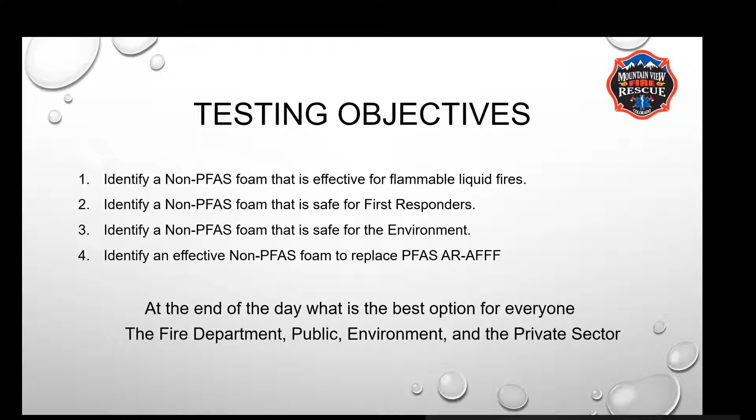House Bill 1279, that's the House bill that made it illegal to sell or buy the PFAS-containing foam next month, August 2021. And so if you need to buy it, you better buy it today or tomorrow, because after next month you're no longer able to buy it.

But they also do a survey every 3 years. So of the 331 fire departments, airports and private industry that were surveyed, only 26 responded. I know my department didn't respond 3 years ago when they did the survey, but there just wasn't a whole lot of knowledge or interest in foam. And one of the things I found, and myself is in this category as well, not right now, but a lot of people don't care about foam until you need it, and then it's a big issue, and you want to make sure you have the right product.

House Bill 2019, this is a certification of registration program. And the way that I read it, I'm not a lawyer, but it permits the use and storage of the PFAS foam. And so we registered the foam that we have at our station, over 200 gallons of it, so that if we had to use it, we're in compliance with the House bill that passed.

One of the best bills that passed is the Senate Bill 2018, and that collects the fee for the fuel transports, which funds the state buyback program. And that's why we're all excited to hear what David Donnie says about the state buyback program. And I think a lot of states are doing that. If we have a bad product and we need to replace it, it's really expensive. So the best thing the state can do is to help fund that replacement. And I know buying these totes, you're looking at several grand, almost 8 or 10 grand for a tote of foam.

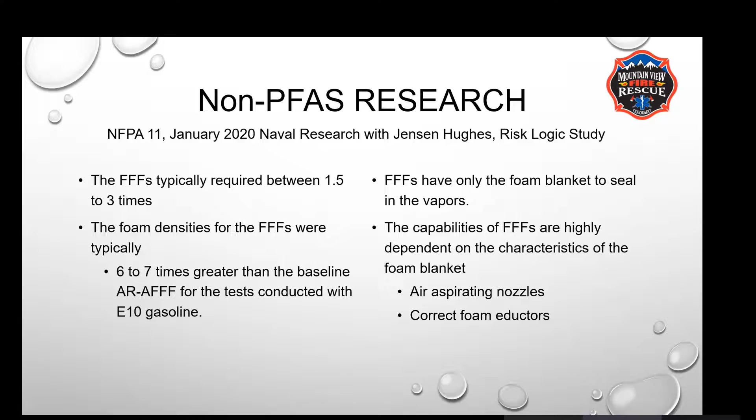Here's the list of the foams that we did. So we had about 15 foams that we tested. This is a list from 91. So we were a little overwhelmed trying to figure out what foams do we test. So we went through and picked out some of the bigger name brands. And so you can see Fomtec, we have Phos Check, Universal Green, Green Fire, Solberg, and T-Storm.

So we went through all these, and one of the things that I did when I contacted these companies is I said, hey, we're looking to replace our AR-AFFF foam. Can you send us a replacement for it? And I got all these foams. Now, Phos Check, they sent me a synthetic foam, but they also sent me a Class A foam because we were testing foams, and they're like, well, maybe we'll get more business, so we'll send you some more foam.

But some of these companies sold their product as a replacement for the AR-AFFF. And this is one of the areas of deception that there is in the foam industry. All of them were UL listed, but there's two distinct differences between the UL listing. One is UL listed per NFPA 18, which is a wetting agent, and the other is per UL 162, which really evaluates the foam blanket and the burn back.

And if you look at the testing for those, they use the same 50 square foot pan, but the way that it puts the fire out is completely different. The wetting agents don't evaluate a foam blanket or vapor suppression. They just see if it can put the fire out. UL 162 evaluates the foam blanket and how well it holds up against fire and direct flame impingement.

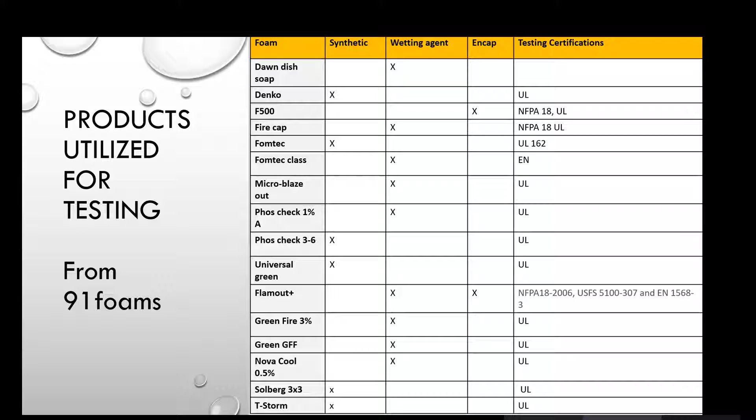And so from this list, we have the synthetic foams, which are the true replacements for AR-AFFF. We also got a lot of wetting agents and then encapsulator agents. And early on, if you do some research about the F500, I was really excited about it. It seemed like it had some good properties, but the amount that you need in order for it to be effective just isn't practical.

So with that initial kind of somewhat deception of what foams will really work, we knew we had to really look at our testing criteria. And one of those was the expansion ratio. Is it even possible to get a good expansion ratio from these foams? Then we looked at the drain down time, and that was just seeing how long that foam blanket lasted.

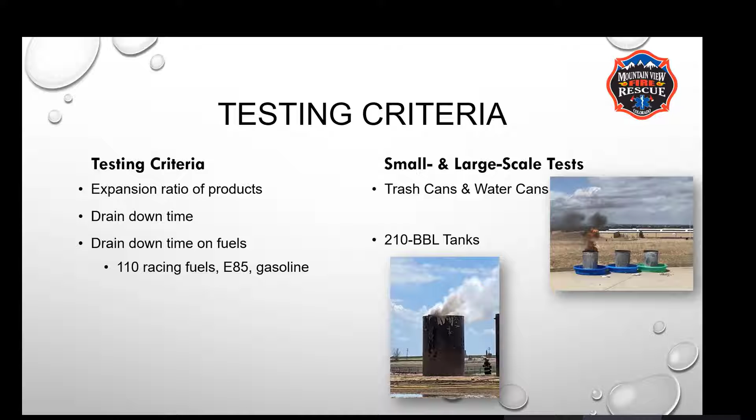And then we tested the drain down time on top of fuels, because putting a foam blanket on the ground really doesn't tell you anything, but putting fuel underneath it will really give you that good indication of how well it performs. And then we took that information to a small scale test. As you can see up here, we lit the fuel on fire, and then we did the large scale test with Crestone Peak. So one of the things, I had never really looked at expansion ratio and how you figure that out and make it scalable.

We came up with the idea of putting a gallon of water in a water can and then putting the appropriate foam mixture and then putting it into a trash can and measure how much volume we got. So here's an example of that. We measured out with duct tape the expansion ratio, and this is Dawn dish soap. We had it around, and all the foams we tested, it was like, oh, you get good bubbles. And so we're like, well, what does Dawn give us?

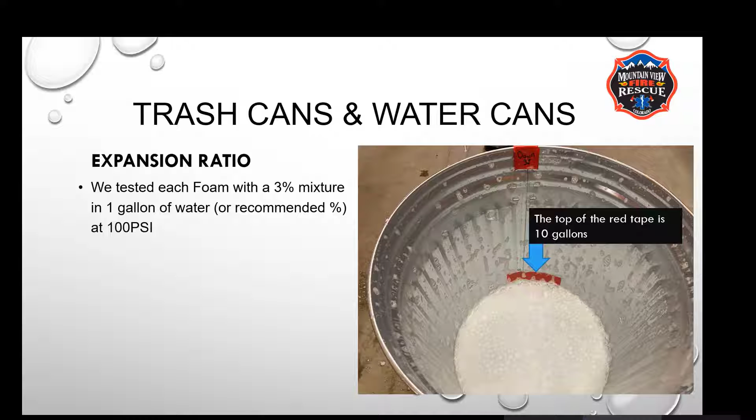And so we tried a 3 and 6% of Dawn and we tested it out, and it had a good foam blanket, but one of the differences is the density quickly evaporated with it. So we did this with every foam to test the expansion ratio and see how long it lasted, and we had really good results. Here's a list. I will note the DT means drain down time, and so we evaluated at 5, 10, and 15 minutes to see if there was any change to the foam over time.

So at the top, I have 3/6, that's the percentage. So some of the foams were 3%, some of them were 6%. And one of the things we had to overcome is some institutional knowledge at my department. We were told once that Micro-Blaze Out works really well on polar solvents if you put it at 6%. We found that not to be true. And so some of the initial foams that we tested, we were like, well, let's see what we get if

we double it. And that also gives you an idea, if you're doubling the foam, of how much you would need. And so if you're fighting a fire and you need 1.5 to 3 times the amount, if you're doubling the amount of foam, it'd give you a better foam blanket, but it also increases the cost. And it was just kind of a curious thing that we were looking at, how much difference. The Phos Check is a 3x6. So it's a 3% ratio for hydrocarbons, a 6% for polar solvents. And so if you're using it on that, you have to use that higher percentage rate.

But we used a water can, which is just a smooth bore nozzle, and we went against the side of the trash can and let it roll down into the trash cans. One of the things is we didn't have much of a budget, and the scalability of it was also an issue. If we flowed 100 gallons a minute, trying to test the expansion ratio would quickly create a huge mess when some of these foams may be potentially bad for the environment. And so we used the water can and trash cans to do all the tests on the small scale.

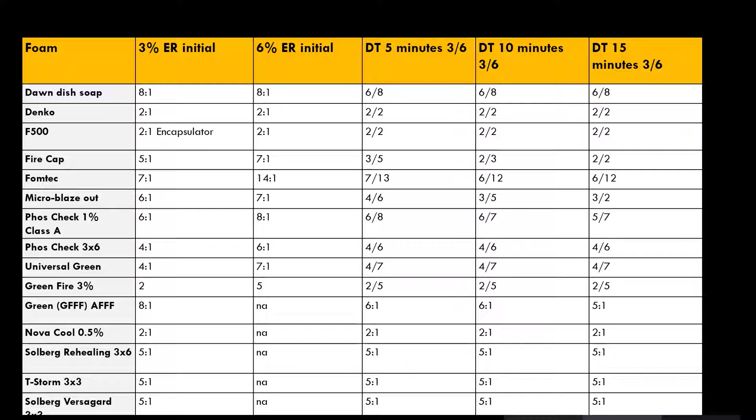And we treated every foam exactly the same. We stood 5 feet away from the trash can. We emptied the water can completely into the side of the trash can, so that we had consistency across every foam.

So for the small scale test, we wanted to see how well the foam blanket held up against fuel. The first thing we had to figure out is how much foam to do. There's a lot of demonstrations out there. So if I put 10 gallons of foam on top of a cup of fuel, of course, it's going to look really good and it'll impress you, and everyone will be like, man, that's a really good foam. But if you look at the math behind it, you're overwhelming it, and you're not going to put that ratio on these fires. And so we went with NFPA 11. They have the application rate.

And that was just a starting point because we had no idea how to do a really good test of the foam on top of fuel. And we figured starting with some NFPA standards was a good starting point. The caveat to that is the NFPA standard says you need that for 65 minutes. And so we took the gallons a minute, put it on the fuel over a short period of time, but we were really looking at the volume of foam that we put on it.

And so we did several tests with the water can to figure out how to get 28 ounces of water out of a water can. We did several tests with a metronome, and for each of these tests, we actually used the metronome to give us that 3-second shot of foam out of the water can to keep it consistent. This is just an example of the universal green. So you can see this is right after we put the foam on.

This test isn't perfect, and we're not scientists. You can see there's little gaps here where the turkey pan didn't fill everything. But right here, this is initially after we applied the foam. It looks like a really good foam blanket. But in 10 minutes, and I have all these pictures labeled so you can go in and look at them, you can see the vapors starting to break through that foam blanket. And we did a minimum amount. We didn't put that 1.5 or 3 times the amount because we wanted to test everything exactly the same.

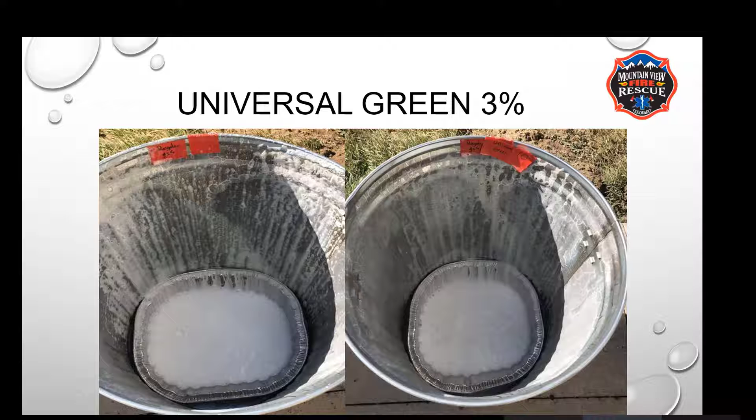Let me go to the next slide. Here's the result of that test. And so we did exactly the same for every one of these foams. We did 3 different fuels to represent the hazards in our district. So 110 racing fuel for the airport, and then we have Colorado National Speedway. We did gasoline because it's the most prevalent hydrocarbon in the area. Every car has it. And then we did E85 to test the alcohol resistiveness of these foams.

There's a lot of information. So yes means the foam blanket was intact. No means it started to break apart. In the initial test, most of the foam struggled to last that 15 minutes. We got T-Storm a little bit later in the game because it was released, I think, in April. When we did the same test, it lasted for 35 minutes on top of the fuels.

And something else I'll note, when we did this small scale test, my crew and I kind of developed some biases with foams that we were testing because we put a lot of effort into it. We had 4 or 5 people that weren't part of that initial testing there to record the information and verify it. So we had Danny from Crestone Peak. He was there to observe it. We had Lieutenant Becker from Greeley Fire. We had Tron from the CPRN group. And then we had Doug Saba, our fire marshal.

They weren't really part of the initial testing of the drain down time, looking at the foam on top of fuel. So they came into this kind of unbiased. I'm sure they had their own biases or information on foam, but they didn't really have all the information and research that we did on the foam. And so they recorded all that information. And I wanted that to make sure that our biases weren't brought into this small scale test, because the intent was to use the small scale test and take it to a large scale test.

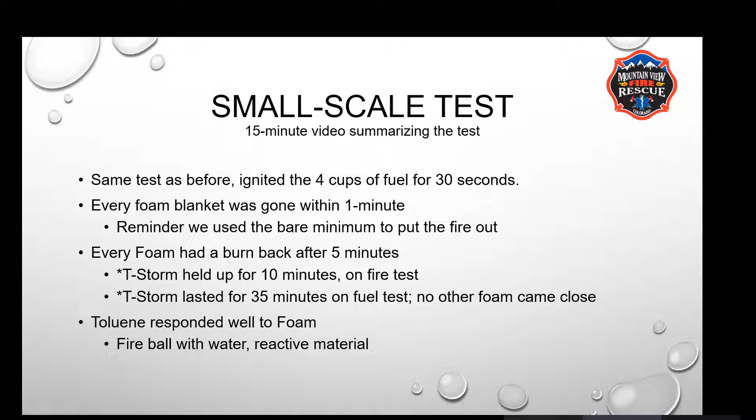The other thing that we tested in the small scale test was toluene. We have Boulder Scientific in our district, and it's water reactive material. We knew that if that catches on fire, we don't know what's going to happen if we put water on it. And so we tested it. We did get a fireball with just straight water, which was kind of cool to see. And it's in the video. But when we applied foam with it, it went out right away. And so I feel confident that if we had a fire at Boulder Scientific and we used foam, we would be able to put that fire out. But if we use water, we'll make it burn down a lot quicker.

So here's I guess a little teaser of the large scale test. And I know Danny just walked out, but when we started this, I had no idea that it would lead to this large scale test where we actually got to test the product on these tank batteries and put condensate in it. And it was a great experience to do that. We had a lot of help to get there.

I know one of the things that I struggled with is figuring out the permits, like how do we light these fuels on fire without violating any EPA regulations or anything. And Dave Burns from Weld OEM was really helpful in that, figuring out all of those legalities. And it was great to have Fort Lupton and Brighton there as well, and Greeley.

And we had the same research team. So Lieutenant Becker from Greeley, Danny from Crestone, Tron from the CPRN group. We had Hugh Kane there from Eaton Fire, and then Doug Saba from Mountain View. They were part of the research group to record all the information, because the test is only good if you can capture the information and be able to share it. The other thing that we did is we had a TIC, and I have a video of it just showing the cooling of the tank, because it's kind of cool information to see.

From the small scale test, we picked 3 foams to take to the large scale test. One of them was Micro Blaze Out. Mountain View currently has Micro Blaze Out on all of our frontline engines, and we use it because it has the bioremediation effect, and it's supposed to be good for the environment. However, when you look at the SDS sheet, it has some warnings on there that it may cause an allergic skin reaction and can cause serious eye irritation. It's a health hazard 1, and its signal word is warning. So caution, warning, danger. And this foam is green screen certified.

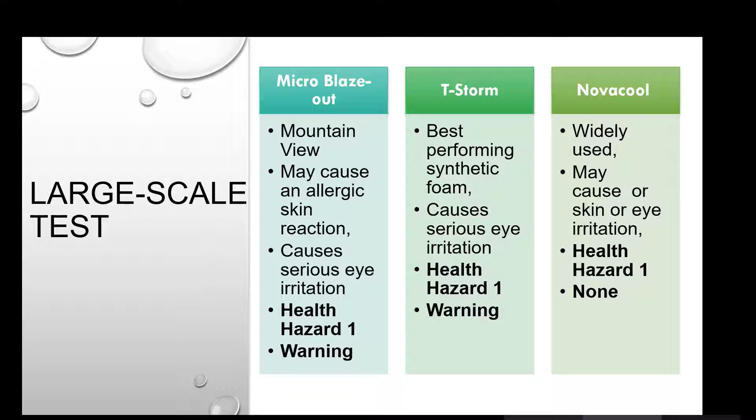One of the advantages is it's health hazard 1, but it doesn't have a signal word, so not the caution, warning, danger. It's supposed to be a little bit more environmentally friendly. So we took these 3 foams to the large scale test, and here's a video of it. It's about 7 minutes long. I have some screenshots of the video so we can talk about the results, and if you guys have any questions during it, it should answer your questions.

The one thing to note for someone that watches this video is that there was a 2-inch nipple on the side of the tank, and that's where we stuck a rod in to light the fuel. That's also where we put the Pro Pack to put the fire out. One of the biggest struggles that I had, and I had to kind of argue and wrestle through this with some individuals who are here in this room who helped me out, is having an effective test. My intention was to use a hand line and show the effectiveness of a frontline engine putting a tank battery out, because that's what we do.

Well, through a lot of learning on my part and an effort to try to get this foam right, I learned that that's not necessarily the best way to do it. And if you do the NFPA 11 application rate for these small 10-foot diameter tanks, the application rate is 12.5 gallons a minute. Now, hopefully that causes you guys concern, because no one in here should fight a fire at 12.5 gallons a minute. It just seems stupid, right? But that's the NFPA standard for these tank batteries, or for tank fires. And it's really intended for these large area tanks.

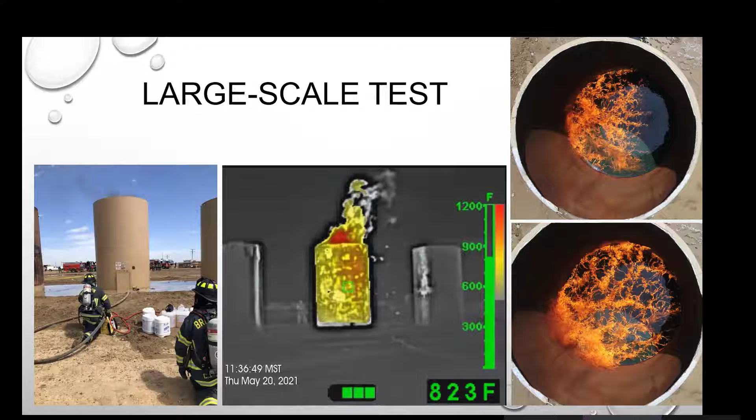But I wanted to see if the math is right that we've been doing all along. Is that application method and all the math correct? And so we did 12.5 gallons a minute through a Pro Pack through the side of the tank, and that's what you'll see.

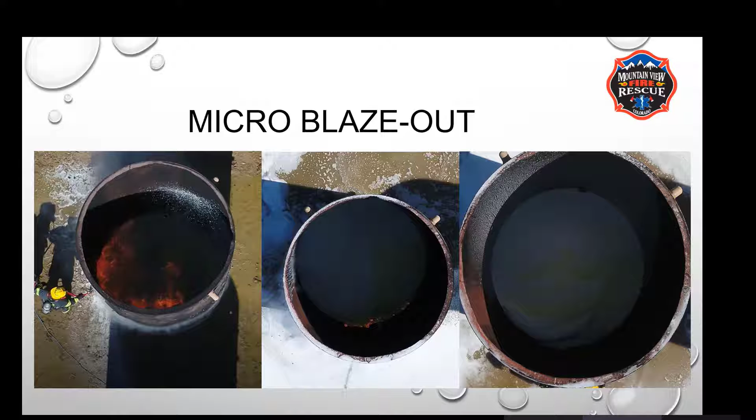And we were originally going to do a 5, 10, and 15-minute burn back. But during that time, we had a helicopter buzz the training site. So we figured flying a drone and lighting the tank off with a helicopter right above us probably wasn't a good idea. But the foam blanket, even putting that much foam on it, didn't last for 15 minutes. Here's a breakdown of it.

And this here, I'll note, so we flowed 288 gallons of water through the Pro Pack to give us the finished foam product. I don't want to get down the rabbit hole of how much actual foam it is because you have to look at the expansion ratio and all that. But that's the amount of water and finished foam roughly that we got. It took 24 minutes to control the fire. The knockdown time was 2 minutes, so it seemed to knock it down pretty good.

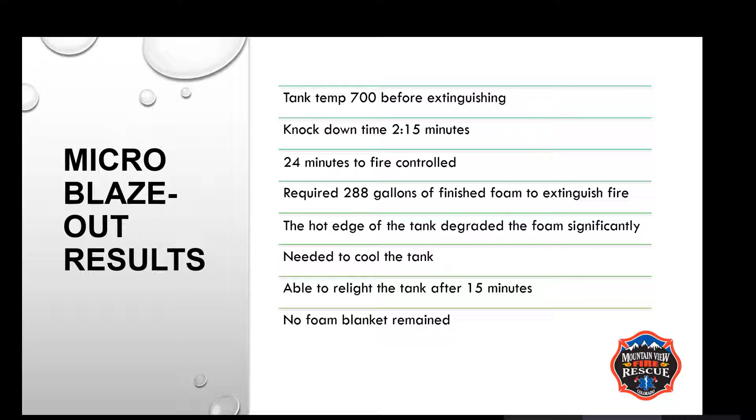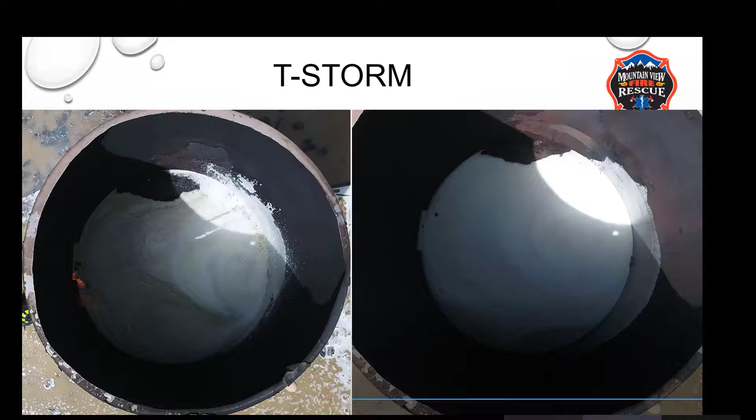But we needed to cool the tank. There was no way we were going to put it out without cooling the tank beforehand, and that was kind of an unexpected occurrence in the test. But it was good. We learned some information. So the next test is T-Storm, and this is the synthetic foam that we tested, and it performed well.

One of the things I'll note, right here is a little peninsula, and that's where the fire started when we relit it. And I think just with this debris, we really didn't know that it was in there before we started the test, and it actually proved effective. I think if there was no debris, it would have been hard to relight the fuel back on fire. But as we were applying it, you can see that the foam blanket slowly makes its way back here. And right here was the hardest part for it to put out because the foam has a long ways to go.

One of the things we noticed is this yellow sheen on top of the foam blanket. As you're applying it, it mixes with the product a little bit, and that's where the ghosting came from, right here. The good news is with that direct fire on top of this foam blanket, it held up. And as we were watching it, we didn't know exactly what would happen, but it shows the strength of this foam blanket. For 10 minutes, it burned along this edge and eventually broke down right here, which was one of the weaker areas of foam.

But with that, it still maintained its integrity for a long period of time, and we only put the minimum amount of foam to put the fire out. And so we felt really good about this test. Right here, we thought that the whole tank was on fire because we were starting to see more growth of the fire as it developed, but you can see there's a very small portion of the tank that was actually on fire, and that's near the debris field. And we were able to put it out with Purple K.

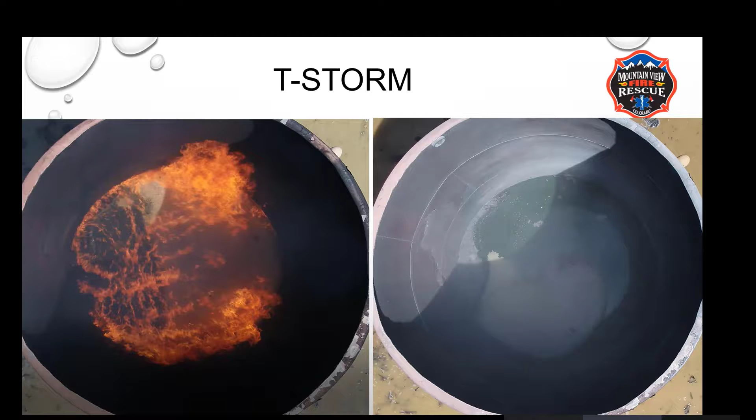And so we tested the T-Storm against the Purple K extinguishers on our foam truck. And after 10 to 15 minutes, we still had roughly 40% of the foam blanket remain. And so that foam did really well and held up. Here are the bullet points. So the tank was pretty hot before extinguishment. We had a really quick knockdown time, controlled the fire in 4 minutes. We flowed 48 gallons of water through the ProPack for the finished foam product.

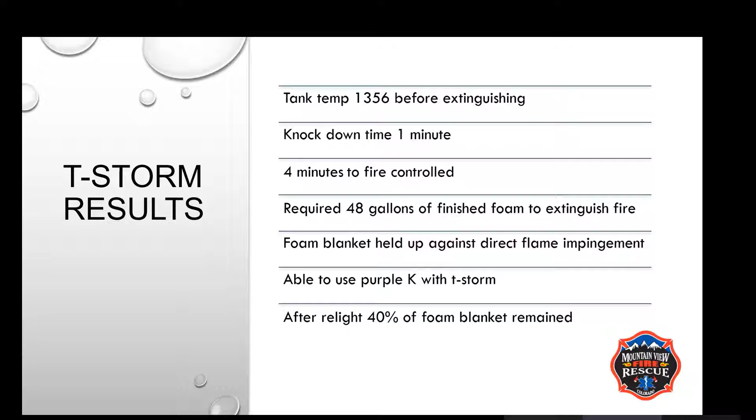The foam blanket held up, and that's what we were trying to prove. Will this foam blanket hold up on a large scale test? We were able to use Purple K, which is really good to know. And then the foam blanket remained even with really hot fire in there.

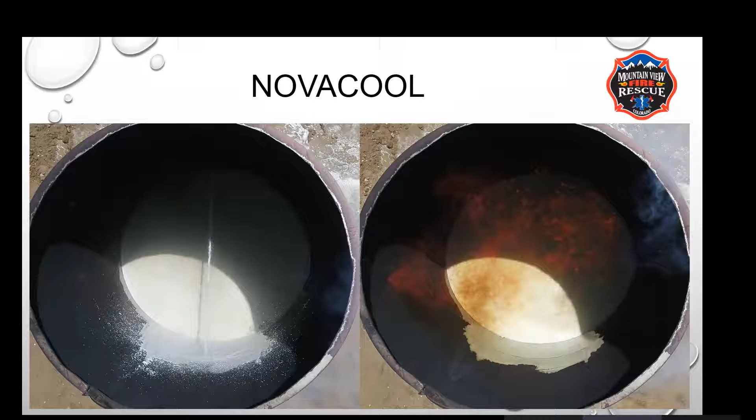So NovaCool was the last foam that we tested, and it put the fire out the quickest. But one of the things that you have to be careful of, and the sales rep will tell you, is it doesn't give you vapor suppression. Like I said earlier, the wetting agents don't give you vapor suppression, and you saw that right here.

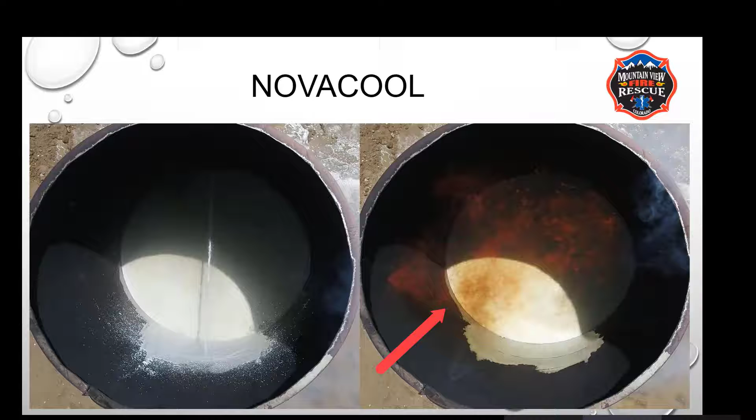There is a complete foam blanket on top of that entire tank, yet it still flashed. And the only way I think that happens is if there's a lot of vapors escaping from that tank. And so there's a lot of deception in foam, in the selling of foam. And this is something important for us to know. If we have a wetting agent, sure, you can put the fire out, but you're not going to get lasting vapor suppression unless you put a ton on it.

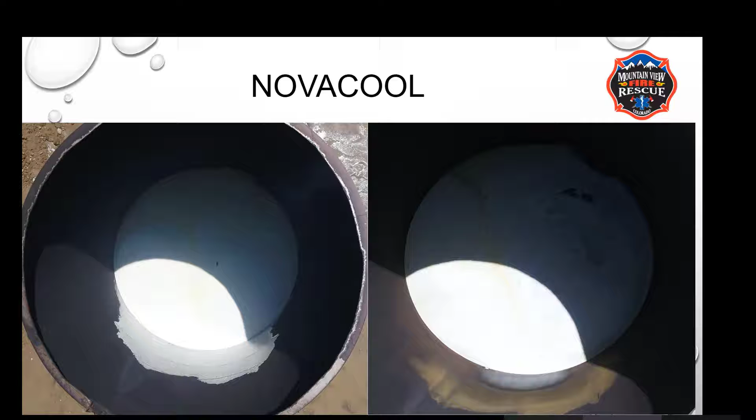The other thing to note is we had what looked like a really nice foam blanket. It looked kind of thick from up here, but it quickly broke down. And this was at the 2-minute mark. That foam blanket started to rapidly break down, and there's a little drone footage of when we went to relight the tank at 5 minutes. There's only a small amount of white bubbles on top of that tank.

So that really showed us too, with Microblaze Out and NovaCool on this large scale. Yes, they can put a fire out. It might take you a really long time, but the foam blanket doesn't last, and vapor suppression isn't there. Here's a quick breakdown of it. We used the least amount of water to put the fire out, but the foam blanket rapidly broke down.

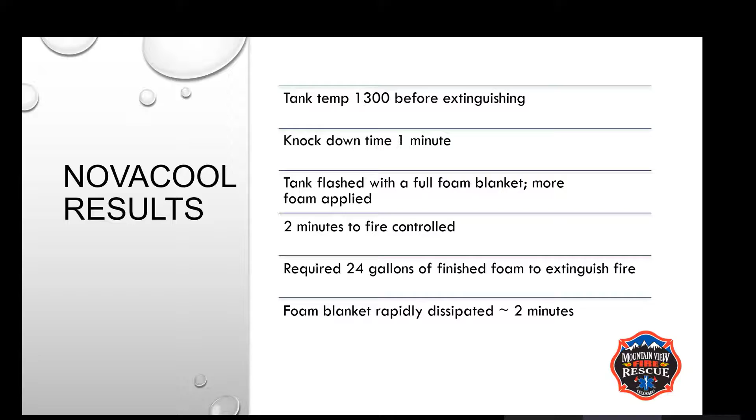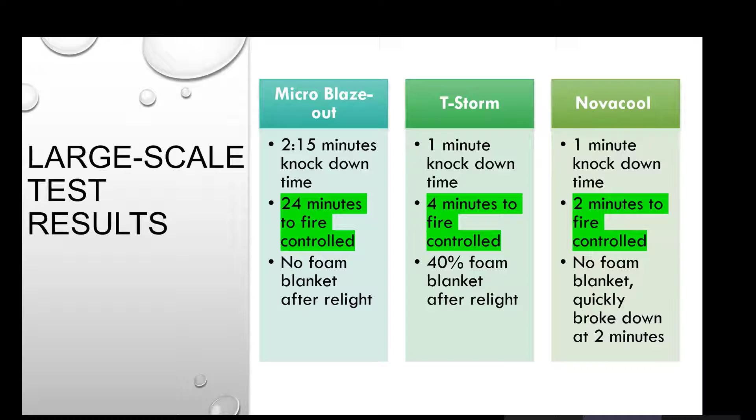Here's just a little side-by-side comparison of what we had, because I think it makes it easier to compare them. And so you can see the knockdown time is on top, the controlled time, and then just a little note about the foam blanket. And then here's another little video that shows the cooling of the tank from one of our tests that we had that I think is kind of neat.

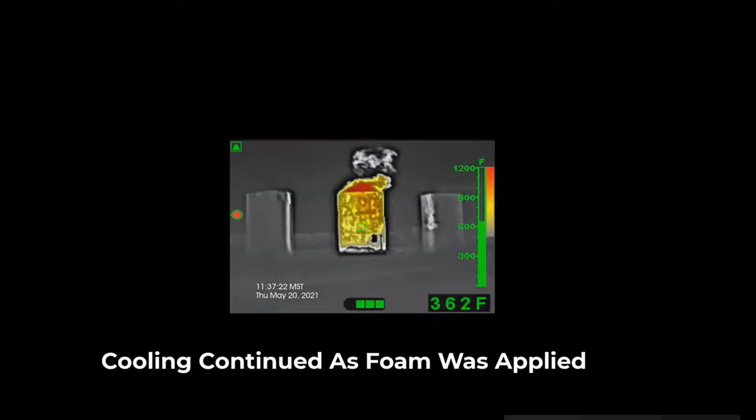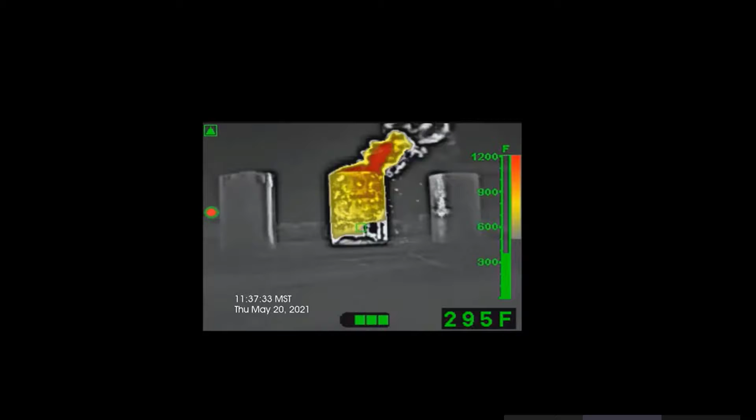That was a cool video, I thought, because we don't usually see the effects of cooling the tank, and just with a little bit of water, we're able to cool these tanks and help put that fire out. In doing all this research, I realized that foam is really only half of the story. One of the things we have to look at is our equipment and how we're putting these fires out.

One of the things that I've learned talking with a lot of individuals is the safety factor for these tanks for boil over, slosh over, or if the lid were to pop off, is 10 times the tank diameter. And if most of these tanks are 10 to 12 feet in diameter, having a safety factor of 120 feet gives you that safety factor for boil over.